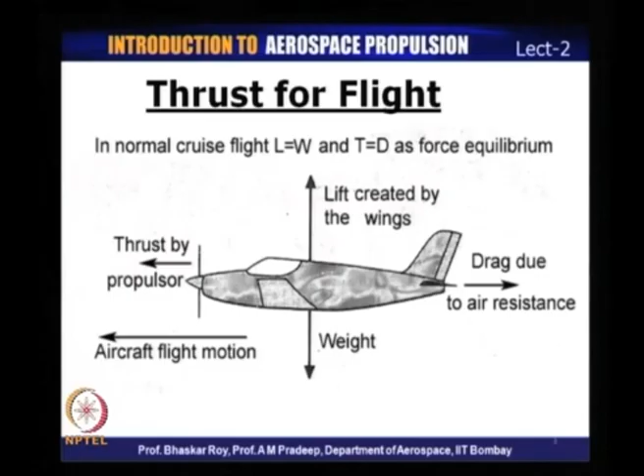The early few devices that were created were in the designer's drawing board. One of them was by George Cayley. Now, George Cayley is quite often credited with being the father of modern aeronautics, and he created much of the science that is used even today for understanding aircraft flight.

A little later, a gentleman called Samuel P. Langley created another kind of craft. This had two wings, one above the other, and is often referred to as a biplane, as opposed to the first one, which is often referred to as a monoplane. A monoplane had one wing on each side, so two wings on two sides. This had four wings, so two on each side in a symmetric manner, and this was a little later, in the late 19th century.

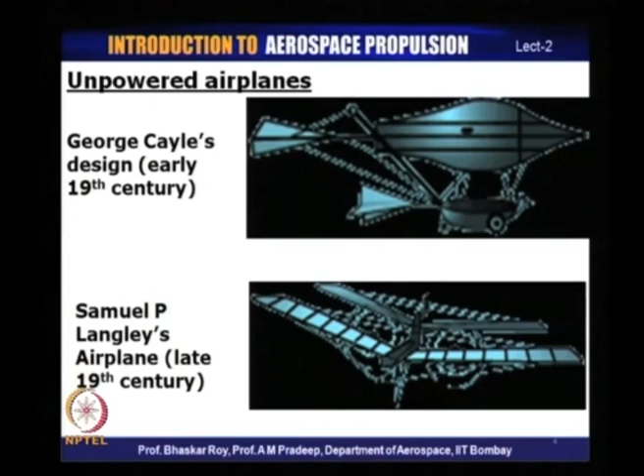This was the first attempt to create something that could possibly fly. One reason for two wings was to create sufficient lift to balance the weight, so they created two sets of wings on each side, resulting in two sets of tail planes at the rear. This is not exactly what birds do, but people realized a craft couldn't exactly look like a bird, and that difference is what appeared as the biplane. Samuel Langley's biplane was attempted to be flown.

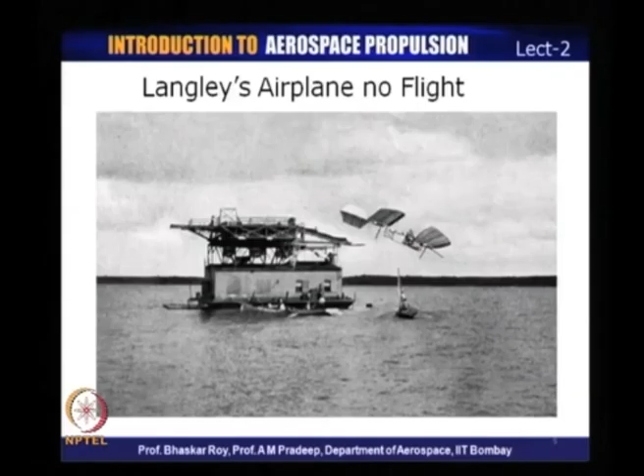This picture shows that the first attempt at this flight was unsuccessful, and as soon as the craft took off from a ramp on a water body, it immediately crashed into the water. One reason was possibly that the power available was not sufficient for the craft to balance its drag in the air.

As a result, people looked at various kinds of powering devices that would finally propel the craft through the air and provide sufficient power on a continuous basis. This required creating engines to drive the propeller. By that time, it was known you needed a propeller to make an aircraft move in air. The question was what kind of engine you require to make the propeller create sufficient thrust.

One of the first attempts was by Lorin, who created what can be called a kind of jet engine, but based on the piston engine concept prevailing at that time, which had already appeared in the market. A piston would move and expel gas, probably every second stroke, and this expelled gas would create a kind of jet action, which, as per Newton's third law which we studied in the last class, would give a reaction and provide thrust every second stroke of the piston.

This was the concept created by Lorin. He quickly realized that a single piston would often not be sufficient to create enough thrust, so he lined up six of them one after another in line, so that all six could produce thrust.

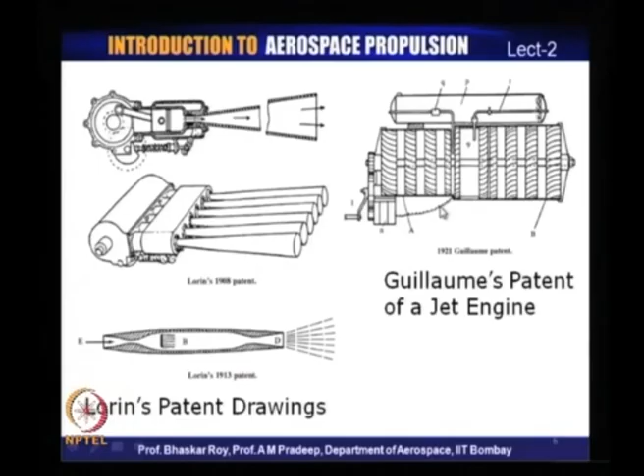The one engine that definitely flew and created the history of the first flight was the Wright's engine. This engine was quite simple - it had 4 cylinders, and these 4 cylinders powered one particular shaft, and this shaft powered the propeller, which flew the Wright brothers' plane, simply called Flyer.

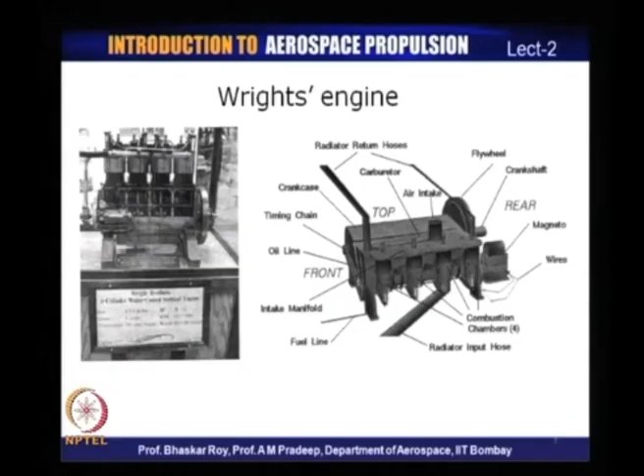This is the detail of one of those pistons, which has all the components, and those familiar with the typical piston engine would find all the components here: the air intake, the intake manifold, the combustion chamber, etc. This was a standard piston engine, and they had enough calculation to realize they needed a minimum of 4 cylinders to create sufficient power for their propeller, and this is what they put on their craft, which flew for the first time in 1903.

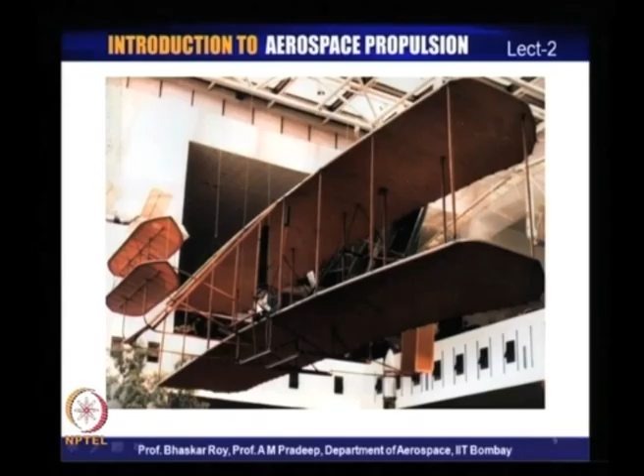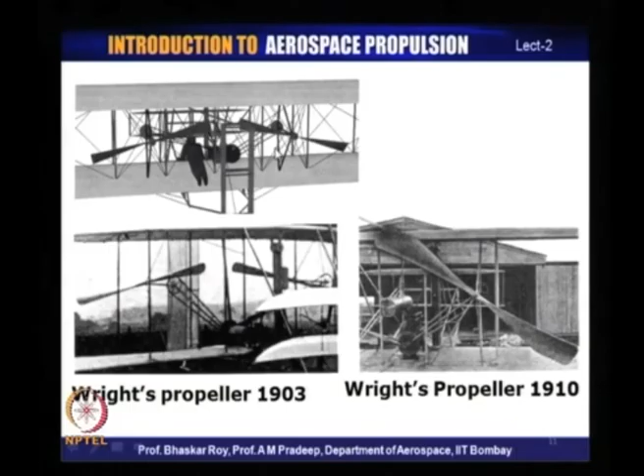There is a historical claim made by a gentleman called Gustav Whitehead that 2 years, 4 months and 3 days before the successful flight of the Wright brothers, a monoplane actually took to the air on August 14, 1901, nearly 2.5 years before the Wright brothers' flight. Somewhere in the US, in Connecticut, carrying its inventor Gustav Whitehead, it is reported to have flown about half a mile, which would be far more than what the Wright brothers flew.

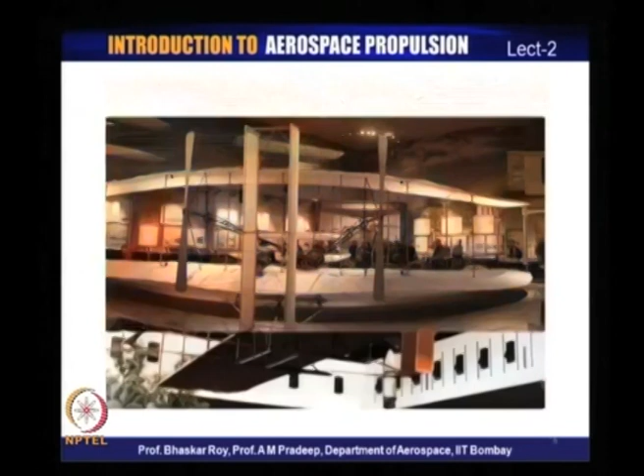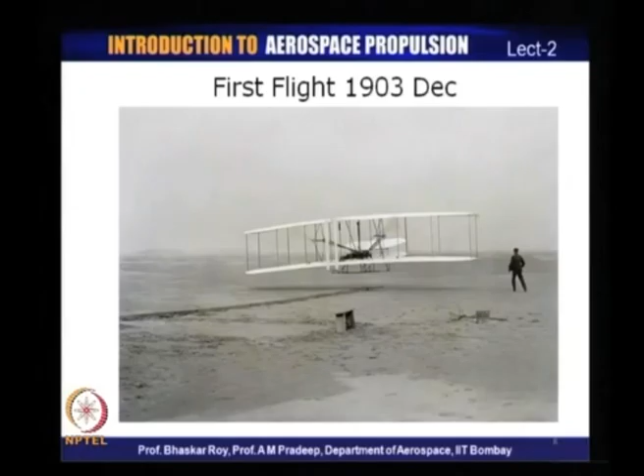What the Wright brothers flew, for example, in its flight was a distance now recorded as equivalent to the wingspan of today's Boeing 747. So it was a very small hop, so to say, but the flight claimed by Gustav Whitehead or his successors later on claims to have been a flight of nearly half a mile.

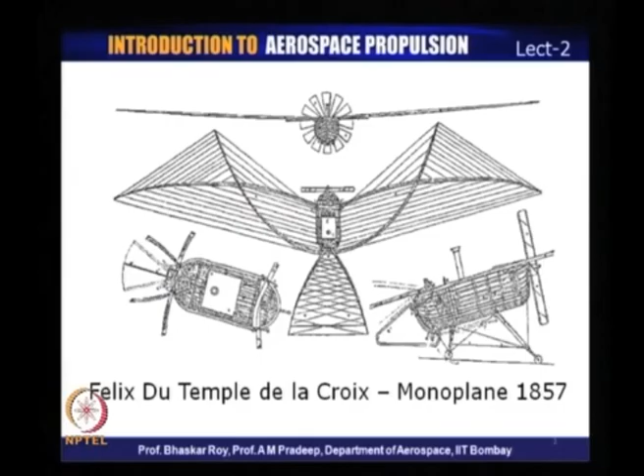There is no record except for this particular picture. It was supposed to be a monoplane resembling the same picture we have seen for Felix Du Temple's monoplane. So somewhere 50 years after Felix Du Temple's monoplane, a gentleman named Gustav Whitehead is reported to have created a similar monoplane and actually flown it. However, this has not been scientifically accepted, and as far as all the historical scientific records are concerned, the first flight is credited to the Wright brothers.

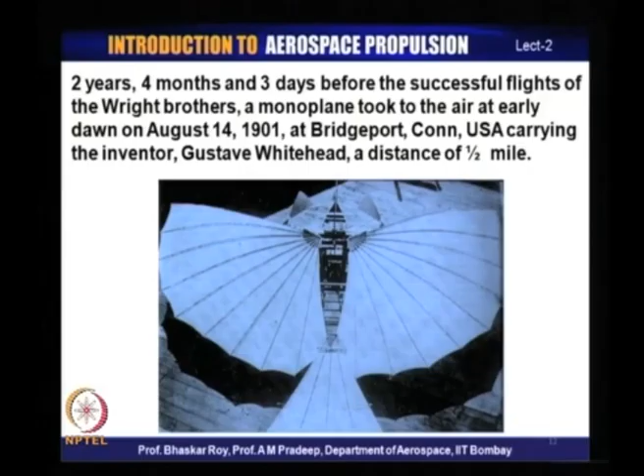What we see now is that all the flights recorded over the first 50 years of flight flew with propellers as the only means of propulsion. Jet engines as we know them today were not the means through which propulsion was done. It was propellers all the way for over half a century.

According to scientific recording manuals, sometime after World War I, a high powered committee in the US decided whether jet propulsion could be used for various kinds of flights, and they concluded that jet propulsion was really not possible within the foreseeable future. Hence they entrusted NACA, the National Advisory Committee for Aeronautics, which was created in the US, with the creation of a large number of propeller blades. These propeller blades were created by NACA between the two world wars.

As we shall see later on, by the Second World War, jet propulsion had actually come into being, and the prediction made by that so-called high powered body had proved to be erroneous. We will come to that in a few minutes.

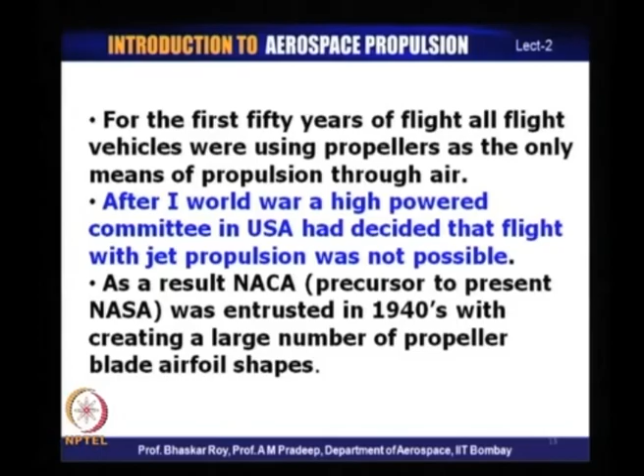Let us go through the development of propellers. Propellers use airfoil shapes. Airfoil shapes were created by George Cayley nearly 150 years back, and it was proven that many birds and fishes have these kinds of airfoil shapes that allow them to move through air or water very smoothly. That shape is what today we call an airfoil shape, and this is what is used in propellers also.

The propeller uses these shapes, and as the propellers rotate, per the shape characteristics, they create lift, and a component of the lift is then utilized as thrust. This thrust is created in a direction perpendicular to the plane of rotation of the propeller, and this must be designed into the propeller. So it is necessary that the person who designs a propeller for a particular aircraft is knowledgeable about the science of propellers, so that the propulsive action created is exactly perpendicular to the plane of rotation, meeting the demand of that particular aircraft.

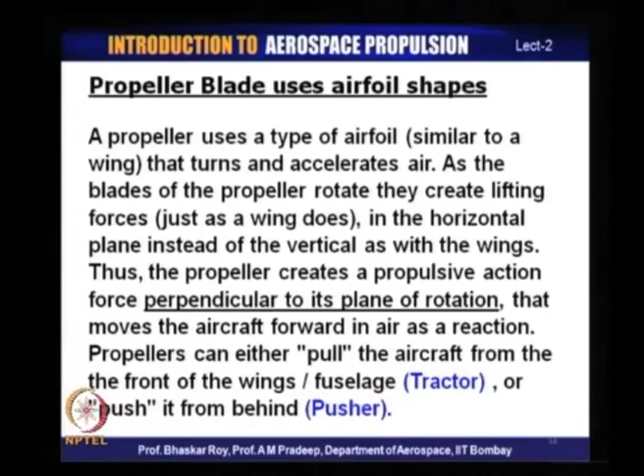Let us quickly take a look at how the propeller actually operates, because that is what made aircraft fly for nearly half a century. In fact, propellers are being used even today for flying many aircraft. The history of propellers flying aircraft is more than 100 years old, and they are still active in flying many aircraft. So let us take a quick look at what propellers actually do.

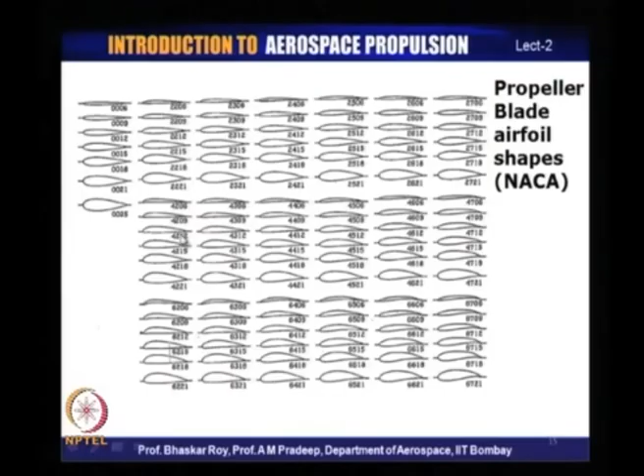Some of the thick aerofoils you see here are likely to be used near the roots. So you probably have a root propeller here, and then they slowly become thinner as you go toward the tip, where you would have a thin aerofoil like this. One such set could serve the purpose of one propeller, and that is how propellers are utilized.

Aerofoils are utilized in a propeller for creating the thrust.

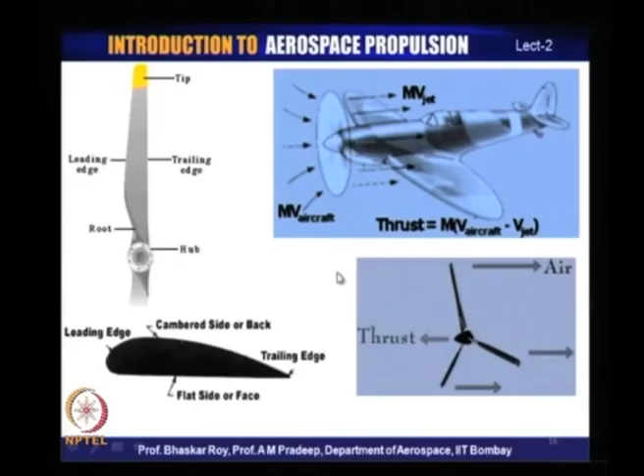As I have mentioned, it is necessary to have an exact estimate of the thrust the propeller would create, because when the aircraft is flying in air, exact matching is an absolute necessity. If there is any mismatch, the aircraft is not going to fly. If the thrust falls short of the drag, the aircraft is going to fall, and if there are any passengers, they are going to be hurt or killed. So it is absolutely necessary that the thrust of the propeller is very accurately predetermined even before it has flown.

You can see here a propeller.

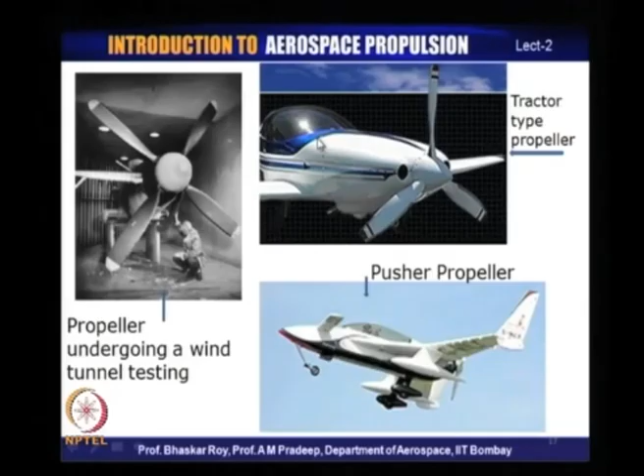So those are the various issues that govern the choice of the arrangement of engines and the kind of engine shape or arrangement that would be finally selected for aircraft. The number of cylinders is decided by the kind of power that is required, the amount of power that is required, and this is to be decided by the thrust that is required by the aircraft.

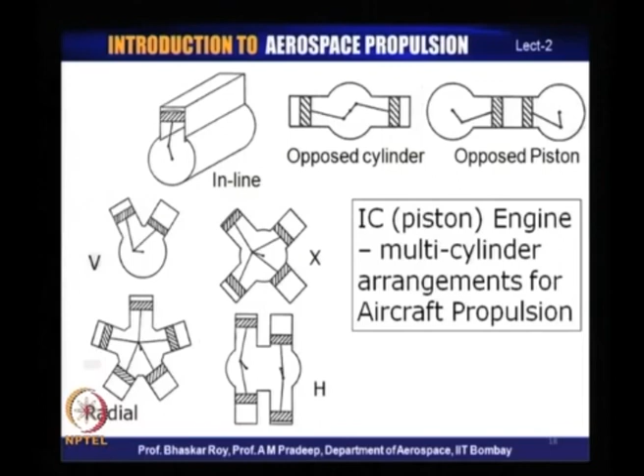So to accommodate the aggregate power that is required, the number of cylinders can be increased. So number of cylinders is decided by the thrust power that is to be delivered by the powering propeller.

These are the pictures of the various arrangements that we were talking about. This is typically an inline engine. As you can see, they have been created in a very compact shape that could go inside an aircraft, and you could have your propeller mounted over here.

And this is the opposed cylinder type, where you have two over here and two on the other side, and this is where your shaft is coming out, which is the central shaft powered by all the cylinders, and this would power your propeller.

This is the V type, where you can see one cylinder here and another on the other side, and you have so many of them lined up, and they power the central shaft, which is coming out over here, and that runs the propeller.

So this is the arrangement which typically would go inside an aircraft, conforming to the aircraft's streamline, low-drag shape. This is a radial kind of engine.

As you can see here, there are so many of them mounted in a radial formation, and they have the central shaft, and you can see here the propeller actually fixed to the engine. So these are the various kinds of arrangements that have been used over the years.

For example, these are the ones you are likely to see in small aircraft. The upper two you are more likely to see in small aircraft, which probably fly 2 people or not more than 4 people, whereas the lower ones you would probably see powering aircraft which fly maybe 6 or 8 people, and the radial engine, which accommodates more cylinders, meaning more power, would typically be used for aircraft which fly more people, something like 10-12 people in one aircraft.

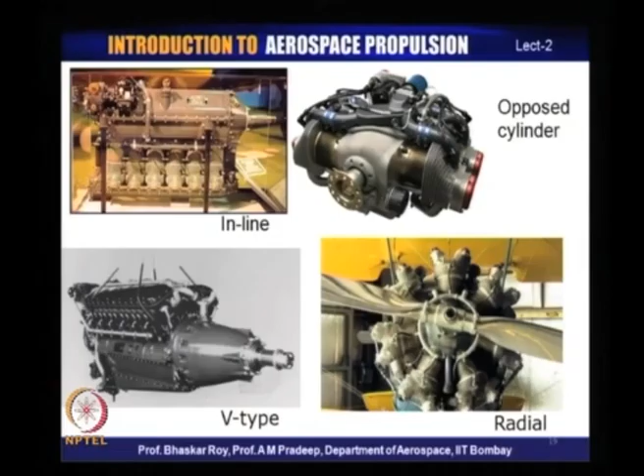Then we look at the various kinds of jet propulsion devices as have been used in the last 60 years or so. The first jet engine that is recorded to have flown actually is the Heinkel engine, created by Ohain in Germany. However, the Heinkel engine is not the first recorded jet engine.

That credit is now given to Frank Whittle, even though historically it is understood that the creation of the Heinkel engine by von Ohain in Germany and Frank Whittle's engine in England were going on simultaneously, independent of each other, and they came out with the engines almost at the same time in their respective countries.

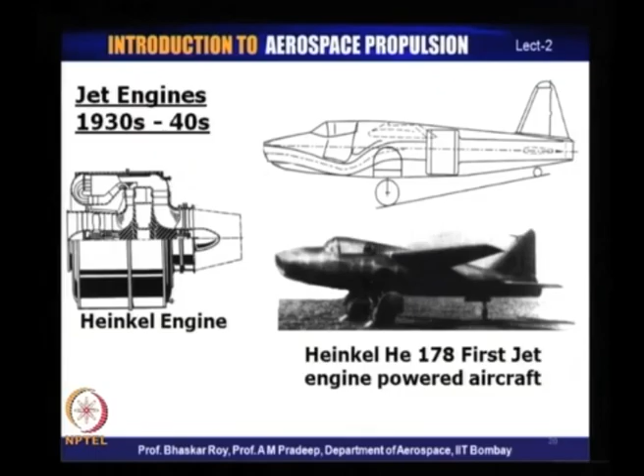The Heinkel engine flew for the first time on an aircraft. Whittle's engine actually flew a little later.

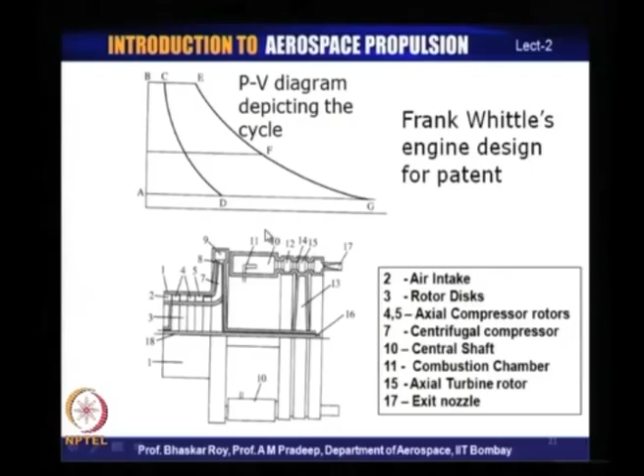This supplied air to the combustion chamber, which drove an axial flow turbine, which in turn drives the compressors, and then you have the jet, or exit nozzle, which finally goes out as a big jet to create thrust. This is the conceptual design which Frank Whittle finally patented and was granted, and that was historically the first patent granted for a jet engine.

The kind of aircraft power plants we have today, there are many of them. We have just seen that in the early years, most aircraft were flown with what is known as piston props, meaning piston engines powering propellers. As soon as jet engines came in, one variety that immediately sprang up was what we today know as turboprops, meaning these were jet engines but powering propellers.

That means the jet thrust available was not the main thrust-making device, but it is a propeller which creates the main thrust. However, immediately thereafter, the actual pure jet engine started coming, and this is the thrust characteristic of these three basic kinds of engines, all three of which are in operation even today.

As the flight Mach number increases from 0 to let us say 0.75, which are still subsonic flights, the effectiveness of the turboprops or the piston props or the propellers starts going down, and somewhere around Mach 0.5, the effectiveness of the propellers has gone down to the level that turbojets become a more effective means of powering an aircraft.

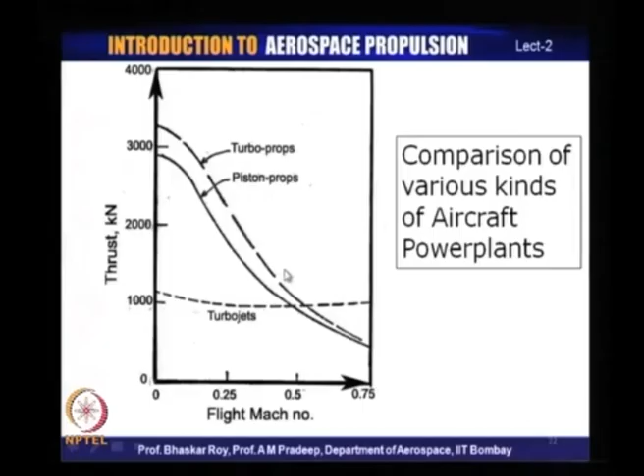If one stretches a little more with the use of what is known as propulsive efficiency, which is actually a measure of the end usage of the available energy for final thrust creation. It is not the same as thermal efficiency or the overall efficiency of an engine as determined from thermodynamics. This propulsive efficiency measures how much of the energy available at the end of the engine action is finally converted to thrust, since not all the energy available for thrust making actually creates thrust. So this propulsive efficiency is the measure of the efficiency of the end use of the available energy.

Now, this provides a quick glimpse of what happens to various kinds of engines. The turboprop efficiency can be very high at low flight Mach numbers; it peaks at around Mach 0.4 or 0.5, and then starts dropping very fast. If you look at the jet engines and their variants, the turbofan engines, they start rising, and from flight Mach number 0.5 onwards they become competitive.

The modern variant of the propeller, which is some kind of a mix between propeller and fan, is called a prop fan, and this extends the propeller's utility up to Mach 0.75 or 0.8, keeping it competitive, after which turbofans and turbojets need to be used to power the aircraft. With a pure propeller, efficiency starts dropping fast around Mach 0.5, while with modern prop fans you can extend it to around 0.75, but thereafter efficiency inevitably starts going down.

One reason propellers suffer from this efficiency defect is because the flow over the propellers, which are made of airfoils, becomes supersonic. The airfoils used in propellers cannot negotiate those supersonic flows in rotating formation, and as a result the efficiency starts dropping due to the appearance of shock waves from the supersonic flow.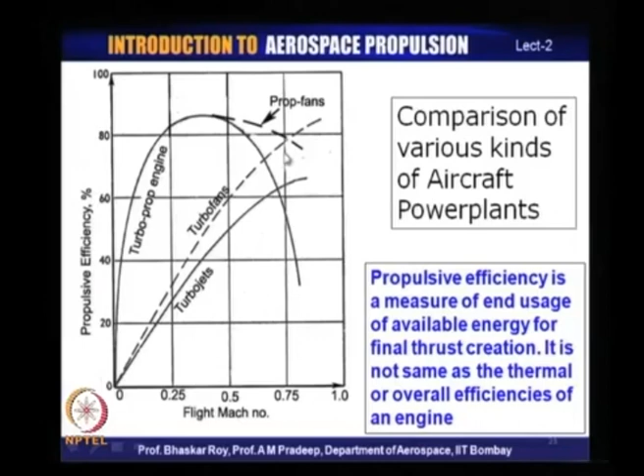In the prop fans used in modern aircraft, which you will probably see more of in the years to come, some low supersonic flow has been accommodated, but even today high or clear supersonic flows cannot be accommodated through rotating propellers. As a result, efficiency drop appears, and hence you need to use a jet engine, either pure jet or turbofan, to power the aircraft.

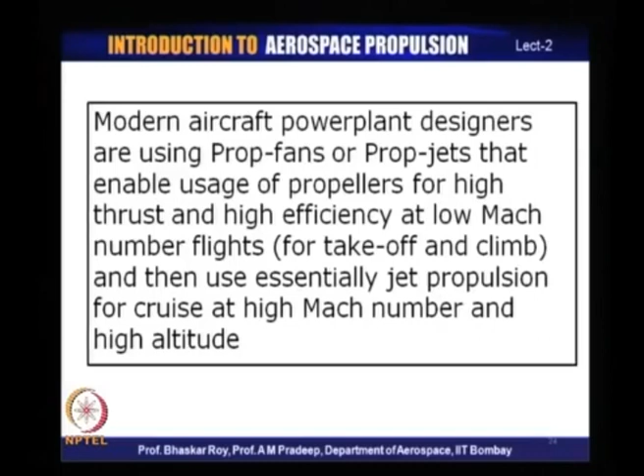The use of prop fans, also called prop jets, extends the use of propellers to high Mach numbers, made possible by redesigning the propellers with new kinds of aerofoils. When we go to the propeller chapter, we will look at those aerofoils and what allows them to negotiate higher Mach numbers as the flow over the propeller blades could actually go supersonic.

As a result, jet propulsion became more and more important, specifically after World War II, and today one of the prime means of aircraft flying around the world is jet propulsion, which we will look at more in the next class.

Let us take a quick look at the fundamental issues we are dealing with here. Thrust generation, as we have seen, uses Newton's second law, which creates thrust finally equated to the mass of air and the acceleration. We can rewrite that as mass flow and change of velocity, and this is the mass flow we have.

Now, if this mass flow is very high and the change of velocity is very small, what we have are propellers—a very high mass of air activated with a very small change in velocity. On the other hand, a very large change of momentum is created by jet engines, which operate with a very low mass of activation. So a very small mass activated through a large change of momentum is a jet engine, while a very high mass of air activated through a very small change of momentum is a propeller.

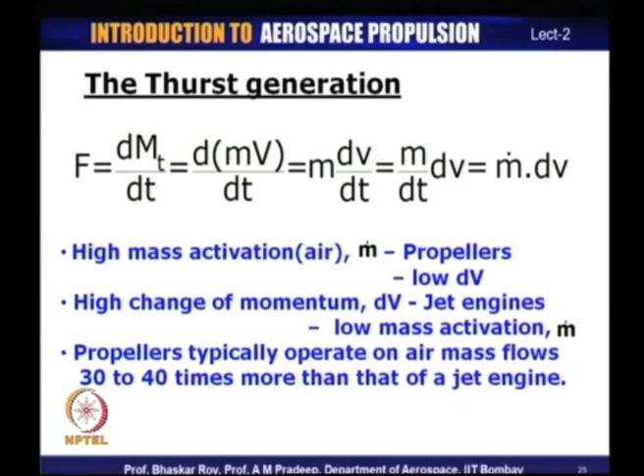So typically, a propeller would operate with an air mass flow that could be of the order of 30 to 40 times more than that of a jet engine of the same size. So the propellers and the jet engines operate on the same principle, but they use the air mass in different ways.

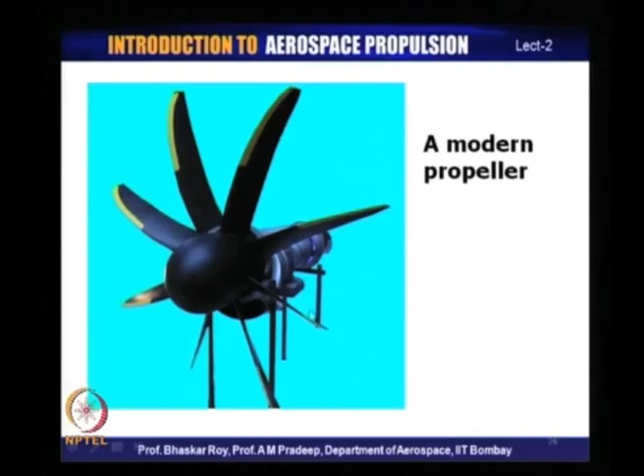This is a typical modern propeller. It has a large propeller, as you can see here—the propeller body is much larger than the engine body. So it is actually geared to use a large amount of air mass.

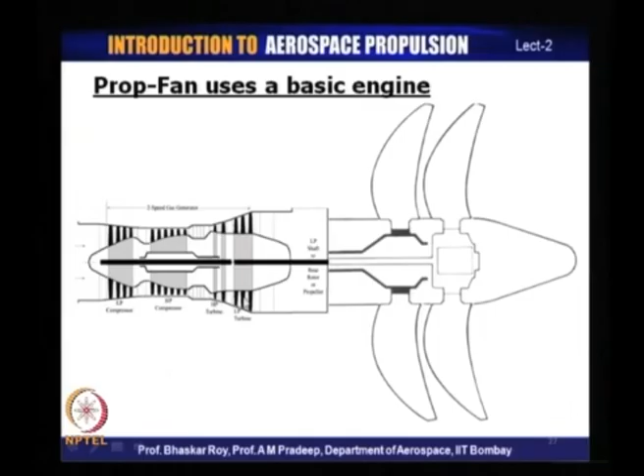On the other hand, a modern prop fan, as I mentioned, and which we shall study later, uses a propeller mounted at the rear of the engine, and you can see here two propellers. The propeller is still very big compared to the size of the engine.

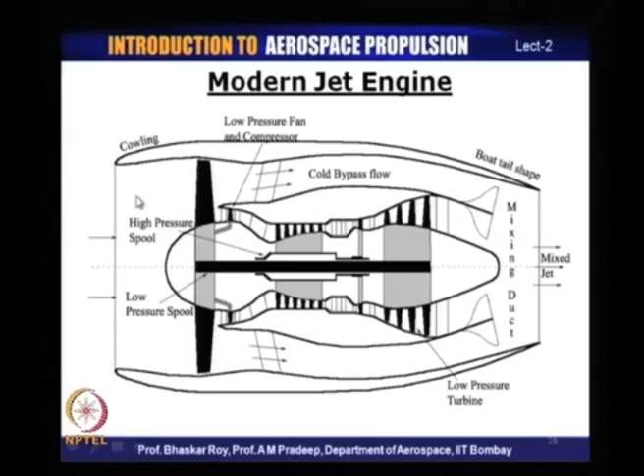In the next class, we will have a look at a modern jet engine. We shall look at its various components, how they function, and finally how they create thrust by using all these components together in a matched manner, so that finally we have a net change of momentum which creates the thrust that makes an aircraft fly. We shall cover the modern jet engines or various kinds of jet engines in the next class.